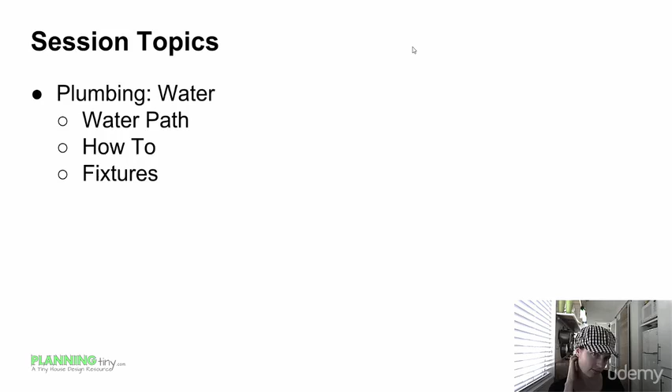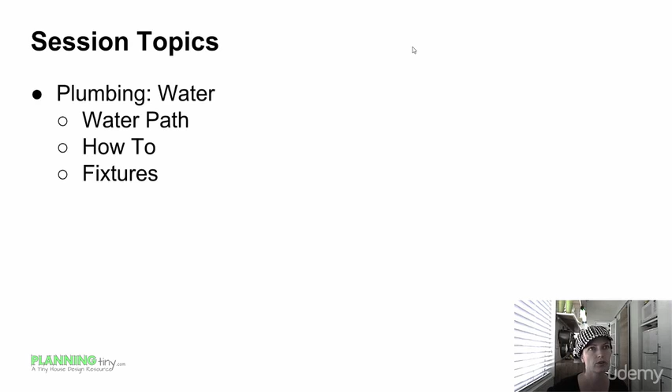In this session, I want to talk about plumbing, particularly as it applies to water in your tiny house. We're going to talk about the path of the water through your tiny house, a little on how to, and the choices to go there, and then we'll go through various fixtures and items to think about with your own fixtures.

So this is not going to be a how-to on putting pipes together. For that, I suggest you buy a plumbing book that will go over all the means and methods of how to put plumbing together, what fittings to use, how to do that appropriately. Keep in mind these plumbing books are really comprehensive, and a tiny house is very basic. They may be 300 pages and you're going to use 30 of them, so keep that in mind. It's a lot of information, but tiny houses are about as basic as they could be in most of their systems.

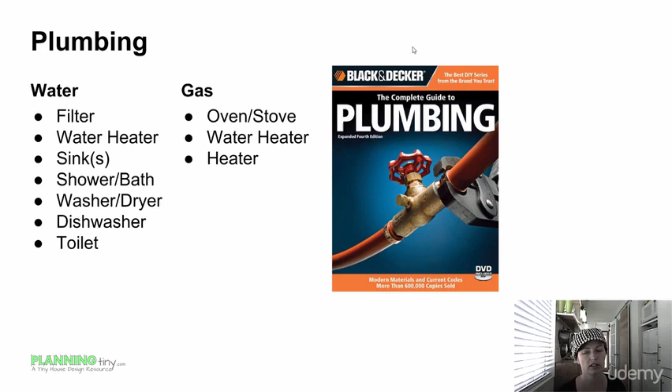So when we're talking about the water, I'm going to go over the filter, water heaters, sinks, shower, bath, washer, dryer, dishwasher, toilet. We'll start off initially with how to get water to your tiny house.

In getting water to your tiny house, you have options. Like with all systems of a house, you have these in a standard house as well, but it's more traditional - if you're in a city, you're tied to the city. If you're not, then you're self-contained. But with a tiny house, you have all the same options and you see a lot more variety.

With water, you can choose to be off-grid, where you're carrying in your own water and using gravity-fed appliances, or you can be self-contained, where you maybe drill your own well and your water comes on site, doing your own testing and whatnot, or you can be tied to the city grid. There's nothing that says one way is better than the others - it's all personal preference.

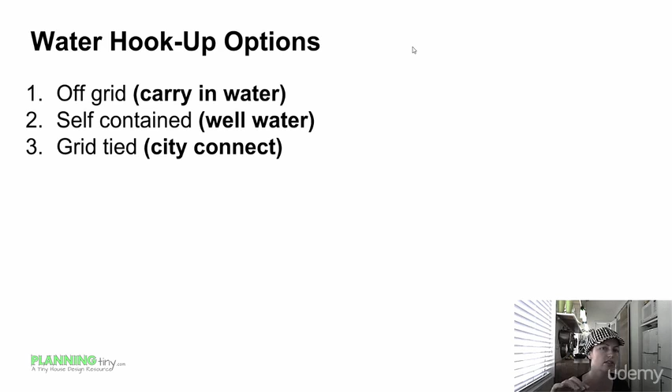When you're dealing with plumbing in a tiny house, you have two systems. You have your supply lines, where you're getting water into your house, and then you have your drain and vent lines, where the water drains out. To help it drain out so you don't get a vacuum and smells backing up, you have a vent system tied to that drainage.

Generally vented out your roof. Some people have a real preference and say it shouldn't go out the roof, it should go out the side of the wall. There's two reasons I suggest the roof is a better location - for me personally, I think it's easier to flash a roof vent than a sidewall vent.

You're not dealing with gravity as an extra force over time. And then not only that, with tiny houses you're limited on your width size. If you pop something out a sidewall, you either have to remove that in transit or calculate that into your width. So personally, I think the vent pipes make more sense going out of the roof.

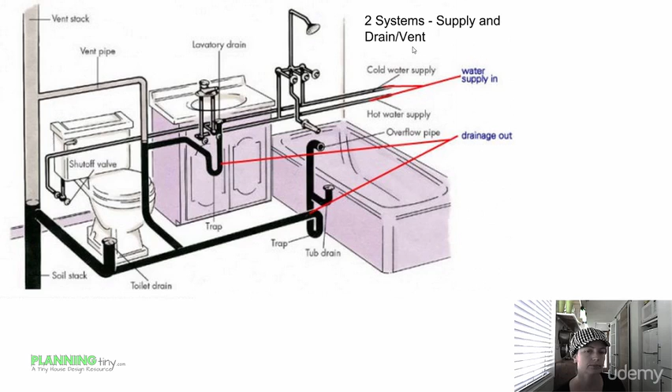Tie them all together where you only have one roof penetration, but you can do it both ways.

So getting water to your house - if you're not carrying in water, you can definitely use 5-gallon buckets all day long, but you can also hook up water directly to your house using a well or city hookup. Most people use a potable lawn hydrant, which is like a hose fixture, but it connects to the waterway underground below the frost line of your region.

Like for my part of Idaho, we have a 2-foot frost line. So it connects 2 feet below ground so that in the winter it doesn't freeze. And if you shut it off, it shuts off the water down underground so it doesn't break pipes. So definitely use a potable lawn hydrant.

Obviously you don't just shut the water off during winter - you need water then too. So if you have a cold region, you can buy what they call heat tape. It's thermally controlled, so there'll be a thermometer on it, and when it drops below - I think usually it's set about 34 degrees - it pops on. You wrap your pipes with this heat tape and it'll stop them from freezing. You can also skirt your tiny house, if all the water is underneath that, and do insulated walls around the plumbing underneath your tiny house, which a lot of people do.

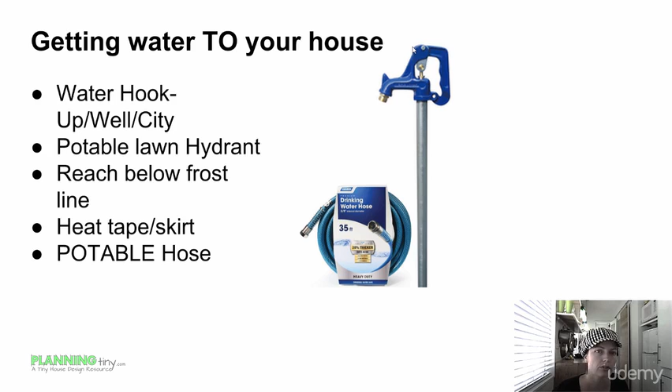If you choose to be off-grid, you can definitely collect your own rainwater, or store it in various holding tanks. You do need to check your local codes. Water rights in this country are a real thing, and they are prosecutable in a lot of states. A lot of states will not allow you to collect rainwater because that rainwater has to percolate into the ground and feed irrigation systems. So definitely check your water rights locally before you opt to go this way.

These holding tanks, you can get a pump and pump out of here, or you can do gravity fed. Holding tanks can be either above ground or underground, depending on how you're going to use your water and your water tanks.

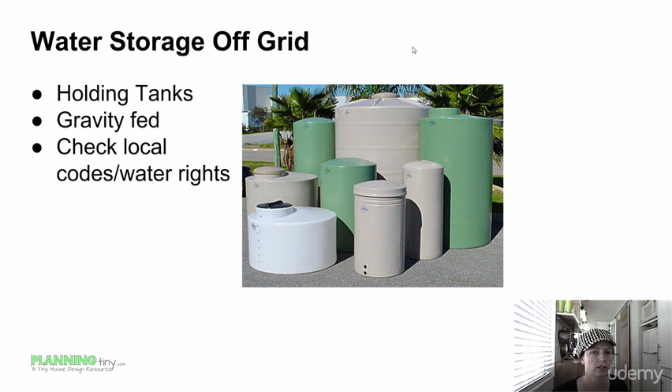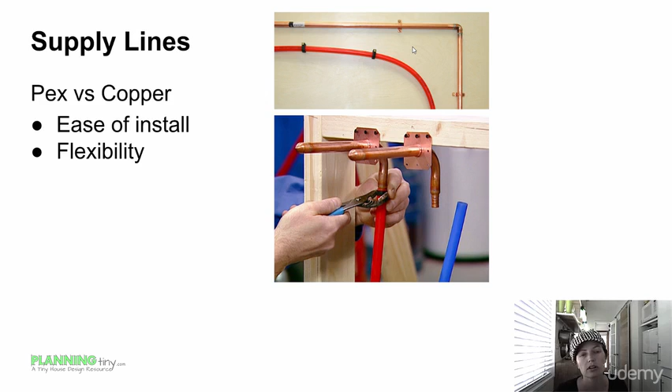When you're plumbing your supply lines for your tiny house, you've got a couple options. The standard is copper—for more years than not, people use copper to plumb their houses. And PEX is quickly becoming an easier and preferred method. So consider the ease of install for you personally. And when you're in a tiny house on wheels, you're dealing with mobile and vibrations, and things might flex more than in a standard foundation house, so definitely consider those things.

Let's talk about copper. Like I mentioned, copper has been the standard. It's an antibacterial product naturally, so that's why it's kind of been chosen to run supply lines. It can be installed inside or outside, but if it freezes, water expands when it freezes, so it can burst a pipe if installed outside in cold weather.

Keep that in mind. The con of it is that when you're soldering together copper pipe, it can sweat toxic materials, so be sure to flush your copper fittings really well before you use it. It also takes more skill and more tools to install because you're soldering pipes and cutting pipes exactly. So it takes a little bit more to install, but it is standard, so you can find lots of people to do that plumbing in that way.

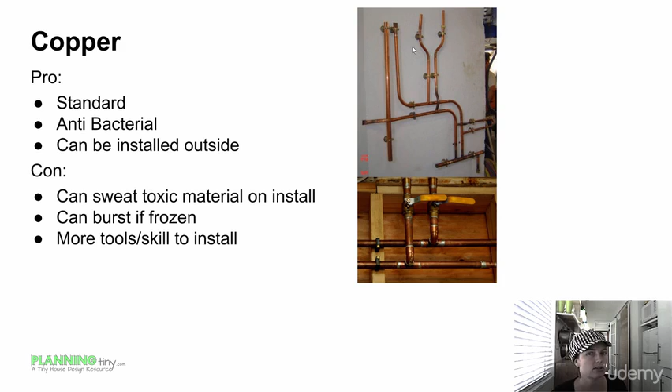PEX stands for cross-linked polyethylene. It comes in red and blue so that you can easily see which ones are the hot lines and which ones are the cold lines. It also just comes in white, which is fine too. Generally it's 1/2 inch or 3/4 inch in a house. This kind of got popular because they used it in the 80s for radiant heat in floor systems, and then somebody was kind of like, well, why don't we just use this for plumbing? It seems to work really well. And it's food rated and everything. A lot of people are concerned that it's plastic and it's going to poison them over time, but it is rated for food and drinking, so that's not an issue.

It is a lot cheaper than copper, roughly 1/3 the cost. It is more resistant to freezing because the plastic can ebb and flow a little bit with different temperatures. Flexible is big for being able to work around other piping in the walls—you don't have to do everything in 90-degree angles. It doesn't lose heat; it's got some insulative properties, more so than copper, so it can travel further distance without losing as much heat, which is important if you're heating water, because you don't want to have to heat up the whole thing before you get hot water. And it's non-toxic.

The drawback of it is that you cannot use it in direct sun. UV rays will destroy it over time, so be careful about that.

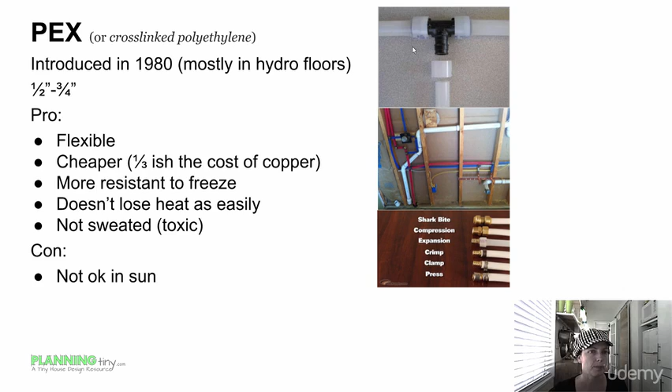In general, I want to just show you the tools. It takes skill and fire to put copper together, whereas it takes a cutter and some clamps to put PEX together.

The thing I do want to mention: the clamps for the PEX, the alligator clips or shark bites, whatever they choose to call them—when you're tightening them down, tighten them all the way and then go a little bit further. There's a lot of people who've done PEX in their tiny house and thought they'd sealed it up all great, and none of the shark bites were fully closed. It feels like you're done, and then you have to go a little bit further. Otherwise, those fittings will all pop off. There's been many stories of people who do shark bite connections in their tiny house, and then they run water and it all just comes apart. It's not a huge deal—it stinks, but you just put it all back together and clamp it down hard.

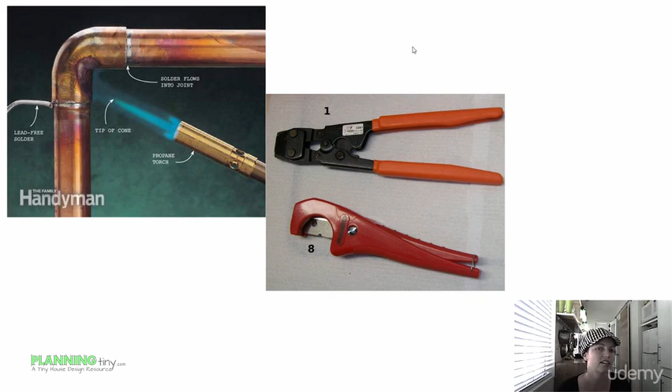When it gets to vent lines, you've got the option between the white pipe and the black pipe. The PVC is the white type and the ABS is the black type. There's really no reason you can't use either. A lot of times this comes down to a preference of the plumber. They both use different types of glue—one uses a 2-part epoxy, and the other uses kind of a not 2-part epoxy, just a black glue. Plumbers generally have a preference for which one they like better.

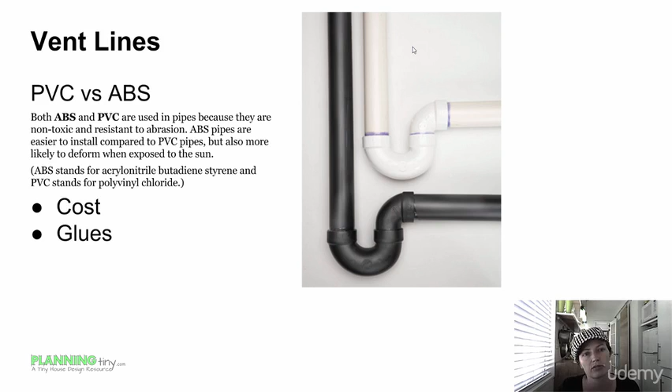Right now it comes down to costs. Initially you used PVC for vent pipes, and then it got expensive, so they came out with this ABS material that was supposed to be comparable but cheaper. But now PVC is actually cheaper at this moment in time than ABS is. So it comes down to what you want to use—a lot of times it comes down to cost, sometimes it comes down to glue, and either one is fine for vent and drain lines.